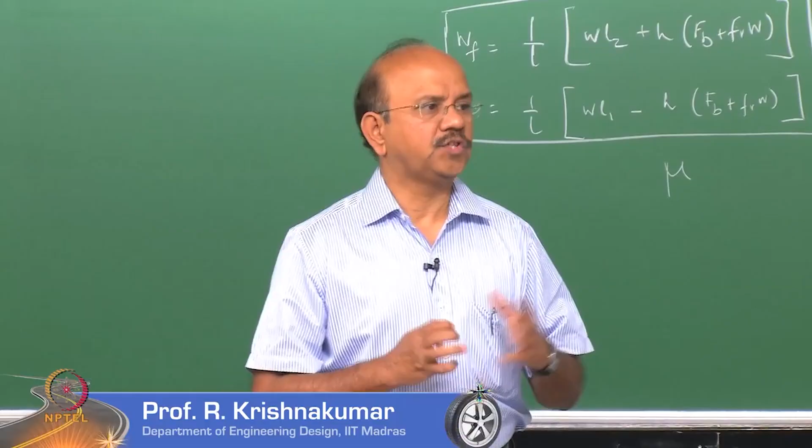We also went to the next step, and we said that we can dump the whole effect of the tire-road interaction into a factor called mu, which is very similar to your well known Coulomb's friction, and said that W multiplied by mu will give me a limiting condition for the wheel to lock. So, in other words, the maximum force that any tire, front or rear, can take would be given by this condition. We can put that the maximum braking force in the front is given by mu WF, and at the rear is given by mu WR. This is where approximately we stopped.

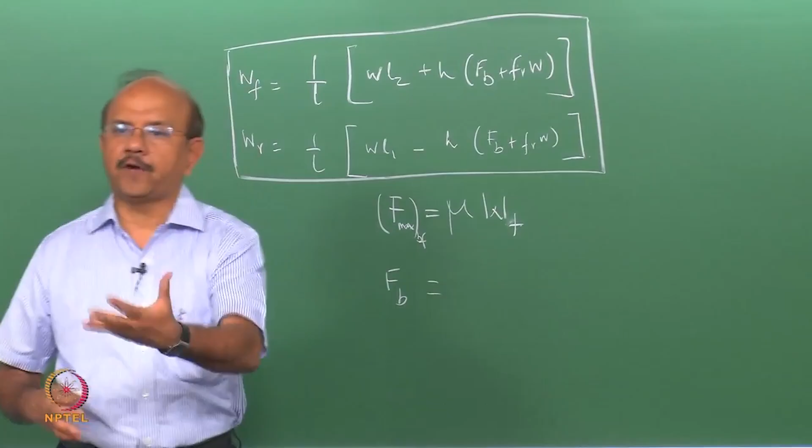We also said that the total braking force is split into the front and the rear. Unlike cars which are front wheel driven, some cars are rear wheel driven, and some vehicles have all four wheels as driving wheels. Braking is distributed in the front and rear. In other words, obviously you know that you have front and rear brakes. Now, the total braking force is distributed between the front and the rear, and let us call the fraction of the braking force which is distributed to the front as KBF, so that the braking force in the front can be written as KBF into FB. In the same fashion you can write for KBR, the braking force at the rear is equal to KBR into FB. Obviously, it is a fraction, so KBF plus KBR is equal to 1.

Fine. Now, let us look at the physics. We have two sets of wheels that are braking, the front and the rear wheels. Now, the front wheel locks when the force generated in the front wheel is equal to mu into WF, and the rear wheel locks in the same fashion. Assume for a moment that KBF and KBR are randomly distributed, we do not know, just one value. What would happen? One of the wheels will lock first, the front or the rear wheel. The front wheel locks, which means it starts skidding, when you give more braking force to the front. Look at it this way: the front wheel is now skidding, the rear wheel has not locked, so it still has some force that is unused for braking. Hence, the optimum condition is one where you use the complete force FB to brake the vehicle.

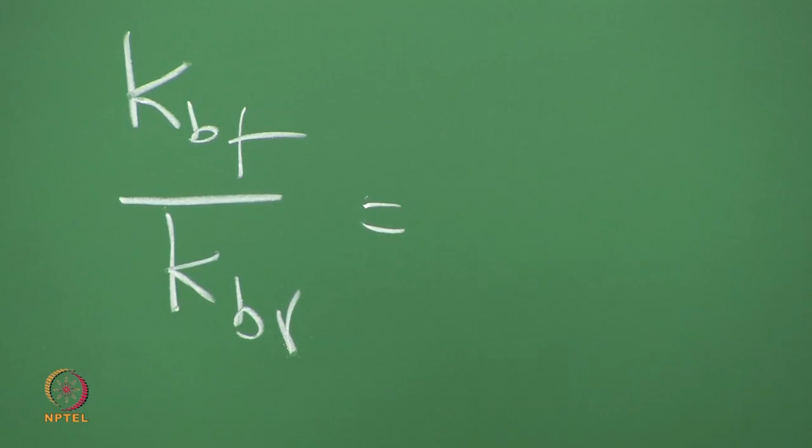So, in other words, if the braking forces are to be distributed such that the maximum braking force develops at the same time, it means they are distributed proportional to the front reaction WF and the rear reaction WR. So, what is that condition? We simply say that KBF by KBR should be proportional to WF and WR. This can be written in a very simple fashion, from this equation, as L2 plus H by L, and I am going to replace FB, the braking force, by means of the deceleration quantities, or you can say mu if you want, in terms of mu into WF. So, we can write this as plus H into mu plus FR, and WR you can write as L1 minus H into mu plus FR.

Okay. So, if the two forces are distributed proportional to WF, which I have just rearranged in this fashion, then that is an ideal braking, where both the front and the rear would brake at the same time. Typical values for this would vary from one vehicle to the other, and even for the same vehicle it would vary.

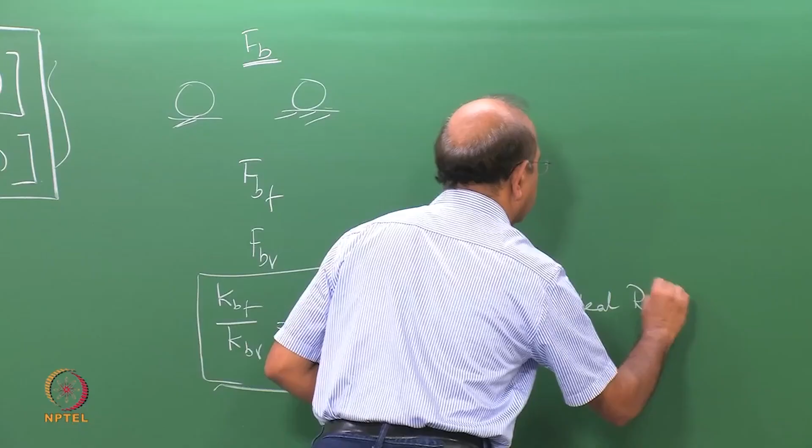Why? Though we say that this is the ideal ratio, it is not a constant, even for a vehicle, and definitely would vary from one vehicle to the other. Why would it vary for the same vehicle, for example? Because when you load the vehicle, it is not necessary that L1 and L2, which are the distances from the CG location, are the same. It may vary. For a truck, it would vary a lot more than a car, obviously. So, when you load, say, a truck, then definitely the CG location can shift to the rear.

Incidentally, L1 in many of the textbooks, and we are following Theory of Ground Vehicles from Wong for this part. One of the books I forgot to mention is by Wong. We will shift from one book to the other, and use our own experiences in this course.

So, one of the things I just want to point out is that instead of L1 and L2, people also use A and B. A and B is very common. In the notation A and B, A is the distance of the CG from the front, and B is the distance of the CG from the rear. I use capital L and small l interchangeably. Both of them mean the distance between the two wheels. So this is the ideal ratio.

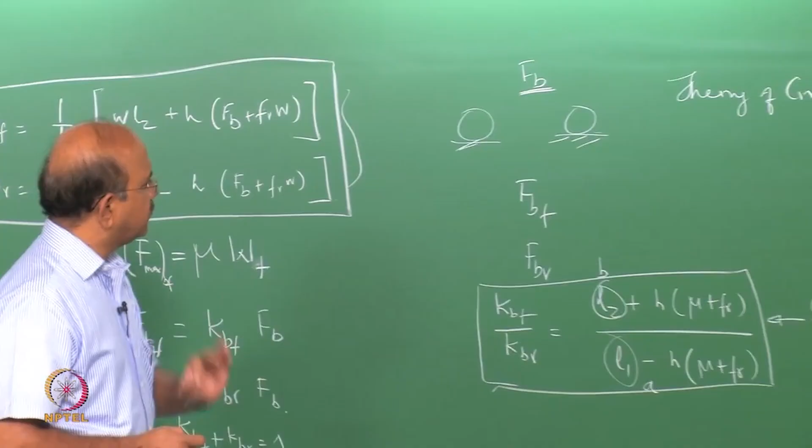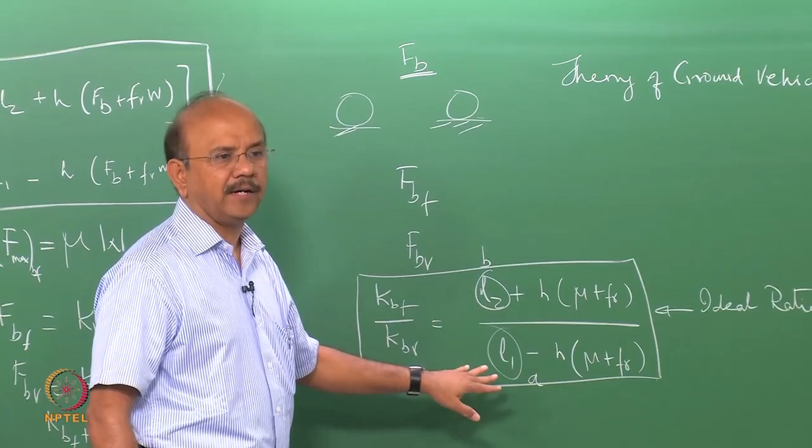So why would it vary within a vehicle? Obviously, when the road conditions are different, mu would be different, mu would not be the same. So mu would change. So for the same vehicle, A and B or L1 and L2 are not a constant. I didn't use A here because you may confuse it with acceleration. That's the reason why I had not used A and B here. I had used L1 and L2 at this place. So this is a problem. You don't have an ideal. That's why you have so many other devices like ABS and other things, in order that we don't get into some conditions which we would discuss probably later in the course.

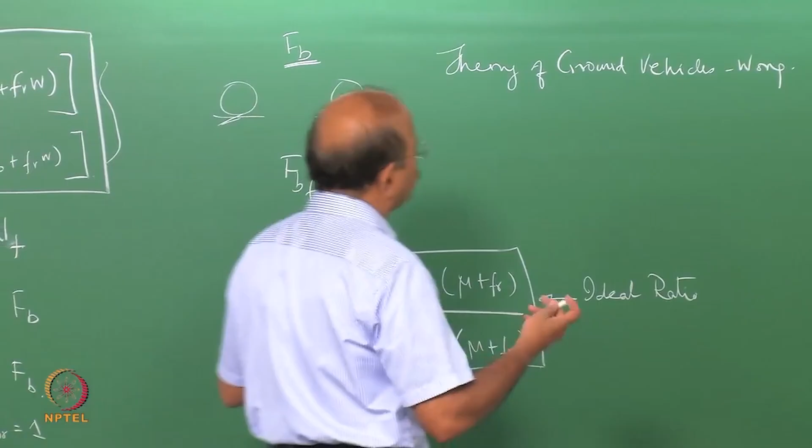Now that's the first thing. Then what is usually used? What is the ratio that you use? It varies. Many of the truck companies today use 50% to 50%. Some of the car companies use 47, 53 and so on. So it's a very difficult ratio to arrive at, because even for the same vehicle there would be a change, and hence we have this problem of fixing a ratio.

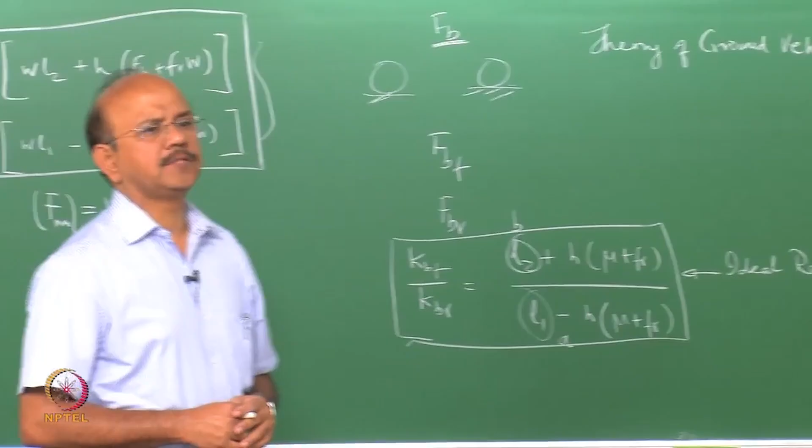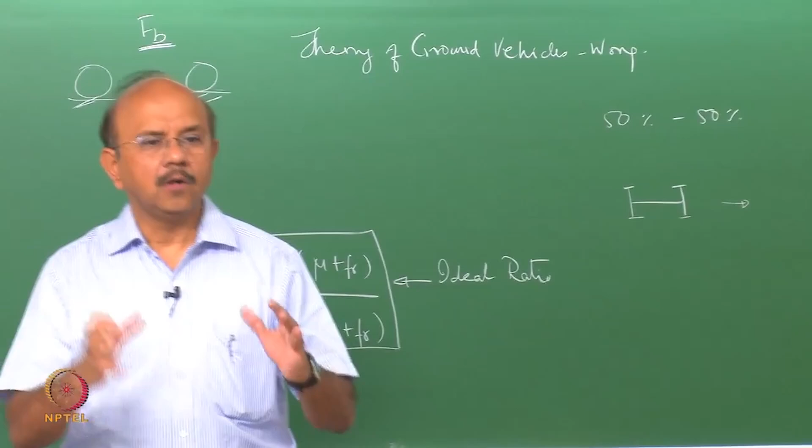Now, why are we worried about locking? What happens during locking? Let's understand that. Let's say that I have a vehicle, just a schematic diagram of a vehicle, which is traveling in this direction, of course. And let us say that one of the wheels locks. Let's say that the rear wheels lock. What is meant by locking physically? Locking simply means that all the mu that's available for that tire has been completely consumed. So no more of that mu, the friction factor, is available for any other force that acts on that wheel. Let's assume that the rear wheels have locked, all mu has been consumed.

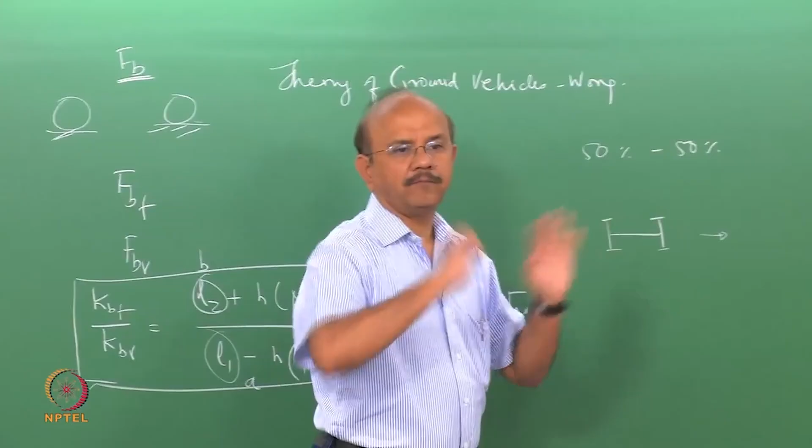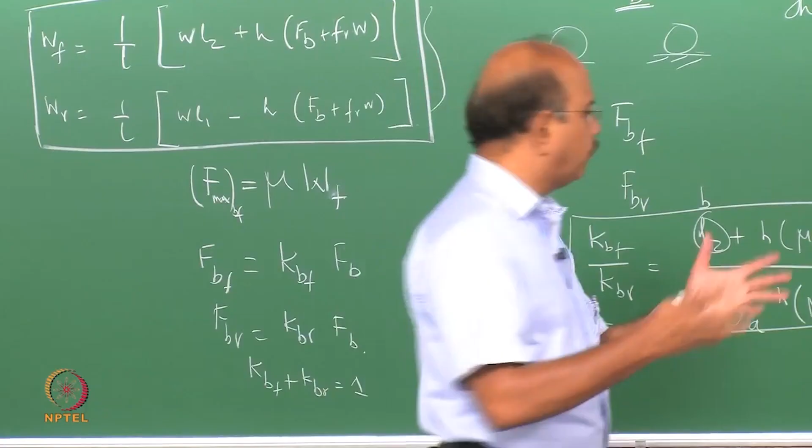Now there is a small perturbation to the vehicle. It is only in theory that the vehicle would run straight. There would be a camber of the road, or there can be a crosswind, or a small undulation, or a small bump, whatever it is. There are perturbations on the roads, and you can't always drive straight, and due to so many reasons your vehicle has to develop a lateral force.

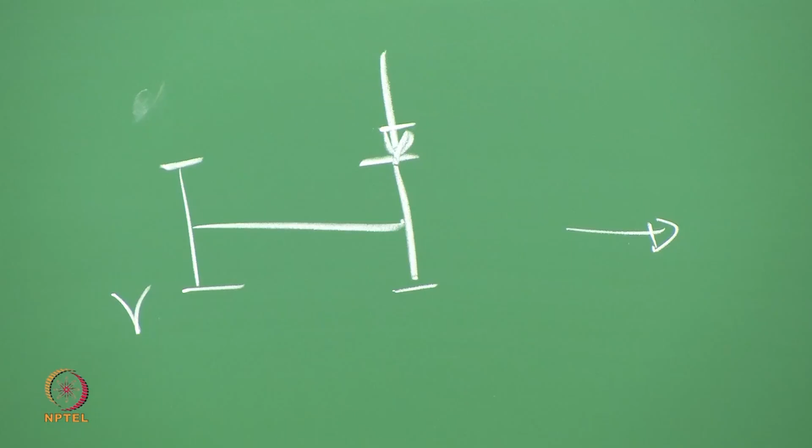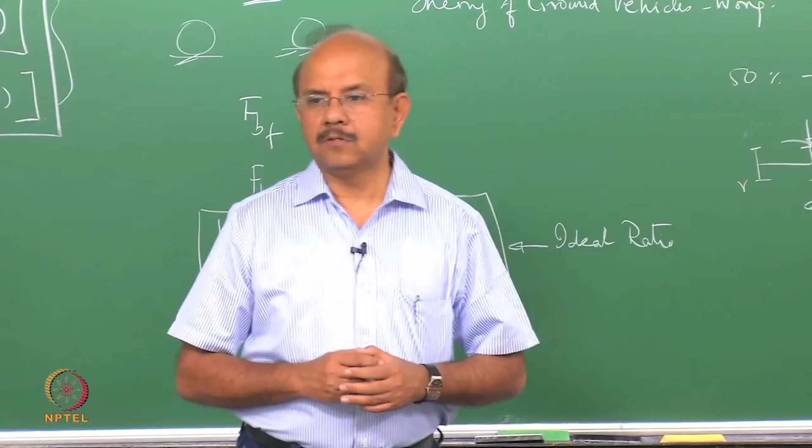This one here, the rear, has lost the ability to support any lateral force, and so only the front wheel would develop the lateral force. So when the front wheel alone is capable of developing a lateral force, that's the situation. All of the lateral force that's required will be developed by the front wheel. So what happens? The vehicle starts spinning, or in other words, the vehicle loses what we would call directional stability.

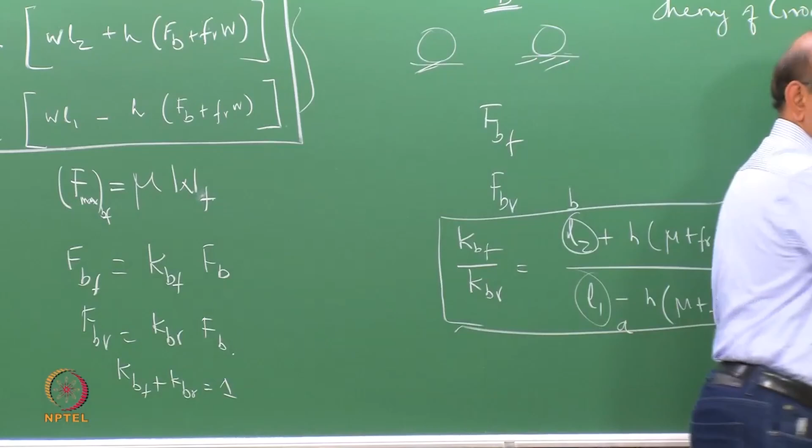So it would spin. In fact, it can spin so much depending upon the perturbations. It can just spin and even go 90 degrees or more. So, when the rear wheel locks, the vehicle loses directional stability and would start rotating or yawing, as it is called. On the other hand, let us consider what happens when the front wheel locks.

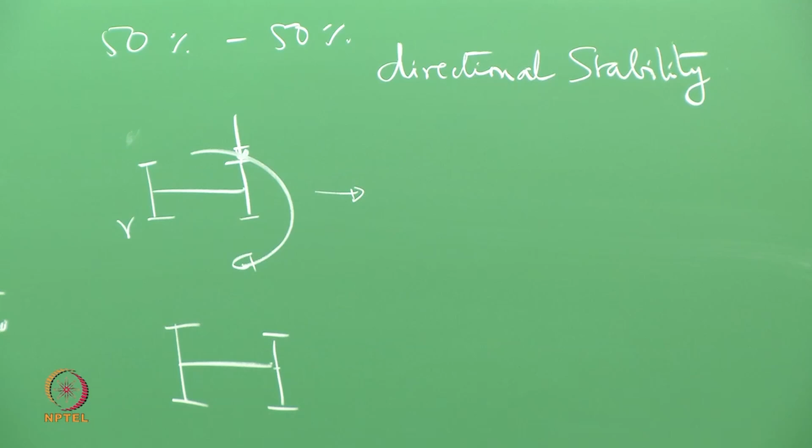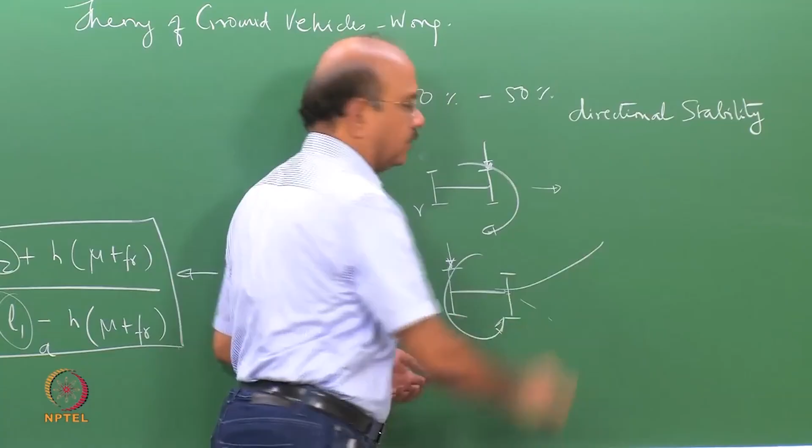When the front wheel locks, obviously it loses the ability to take further forces, and so all the force that is required to cater to the needs of the changing orientation of the vehicle, the lateral force, is at the rear. So, the vehicle would now lose directional control. A small change this side would not happen because the vehicle would now be yawed in the other direction. So, it would now start going like this. Okay. So, we call this loss of directional control.

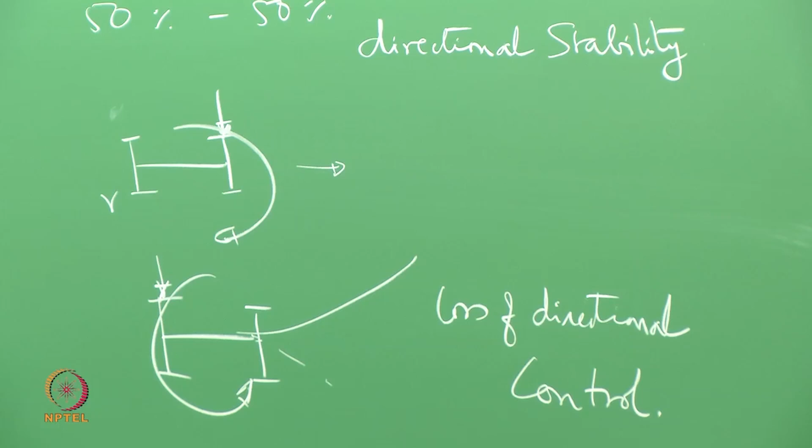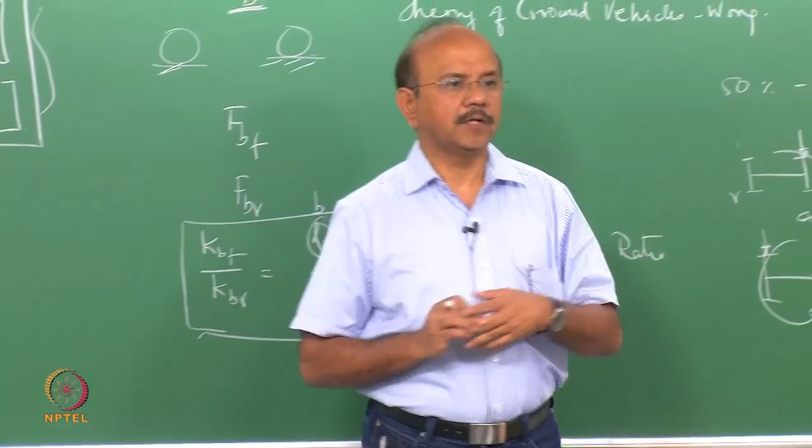Clear? Okay. Now, if you are a driver, you have all the feel for the front wheel, because your steering would give you the feedback. So, when the front wheel locks or is about to lock, you know that something is going wrong. And it is possible for an expert driver to get back from that kind of loss of feel, in other words, to steady the vehicle. On the other hand, if the rear wheel locks, even an expert driver cannot feel it, and by the time he realizes, everything is over. So, we need special devices in order to avoid this kind of locking and loss of directional stability and directional control. Is that clear?

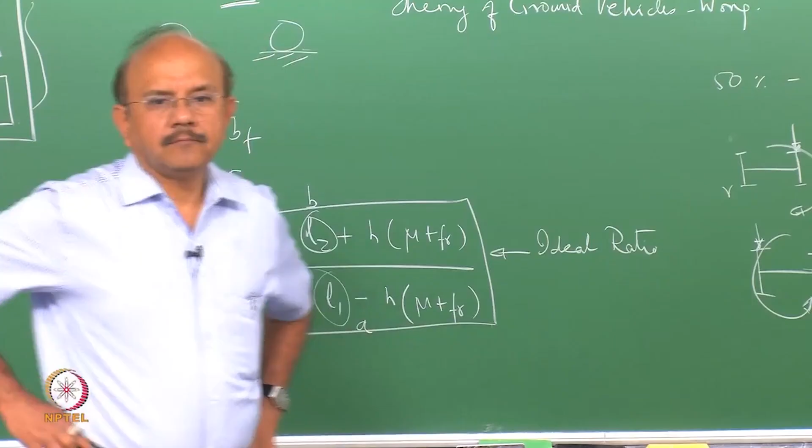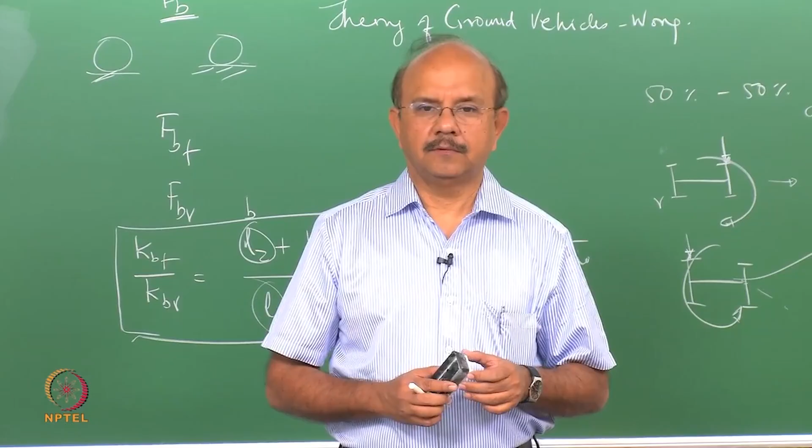Okay. Now, let us go into some details of this braking further. One of the key questions which we are going to ask is, what is the deceleration that can be achieved by given braking conditions? What is the maximum deceleration that I can achieve? Very important question, because ultimately brakes are also judged by deceleration and, more importantly, the braking distance. In order to understand this, we need to understand what would be the deceleration level before the brakes start locking. Right. This is what we are going to do now.

I am going to take two equations, equate them, and then get what is called the maximum deceleration when the vehicle locks. Remember that our good old friend rolling resistance is going to help braking. One of the conditions that we already wrote, neglecting all other forces, of course, let us say we neglect all other forces like aerodynamic force, you can add them, that can be an exercise for you just to bring out the physics. Let us look at only these two forces. So, this will be equal to, denote that we had replaced minus a by d, and hence all the directions are now. So, d is actually the deceleration.

We also have, this is one equation, we also have an equation for WF and WR, and that can be written as, how did we write it? We took W out. What's the first term for WF? L2 plus, what was the term which is inside? FB plus FRW. So what can you do from this equation? You can replace what was in the bracket in the previous case by this, and can I not write this as the deceleration divided by g? Okay. In the same fashion I can write down WR as WL minus d by g. Okay, what was in the bracket? I just replaced it by the first equation. Right.

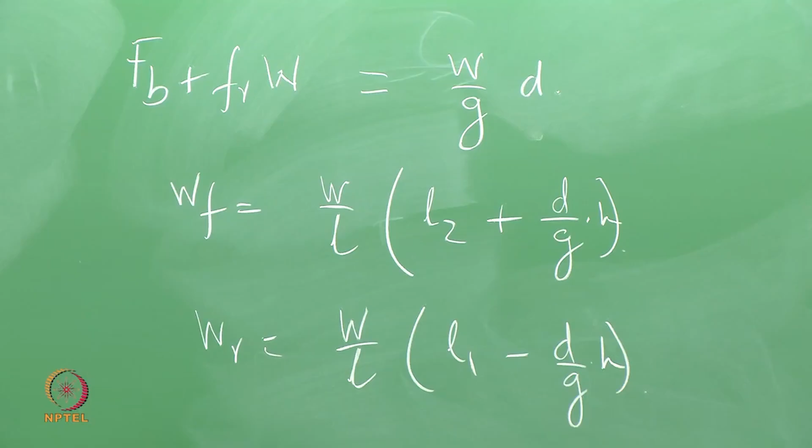Now, let me write down FB from the first equation, call that the first equation, this the second equation, the third equation is FB equal to W by g d minus FR into W. And I also know that the front braking force is equal to KBF into FB, and the rear braking force to be KBR into FB, right? Which is 1 minus KBF into FB, and so on. I also know that FBF will lock, that is the front force of maximum, is equal to mu into WF. Okay, the maximum before it locks is that, and FBR is mu into WR.

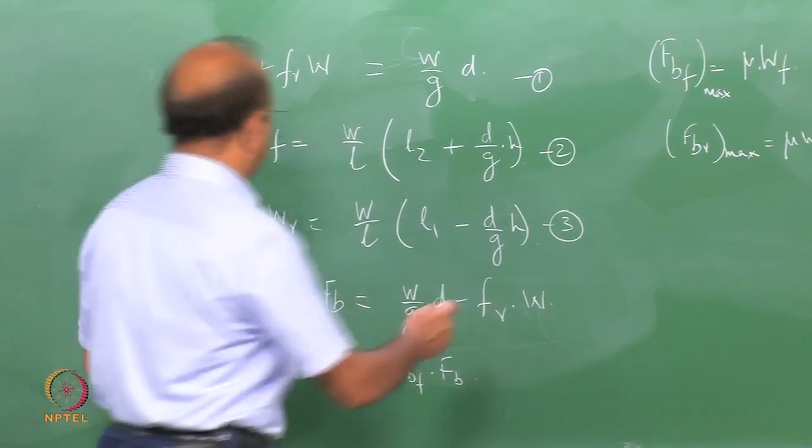So now what I am going to do is, let me call this 4, let me just rewrite it a bit: W into D by G minus FR, okay. And so this would become KBF W D by G minus FR, right? Okay.

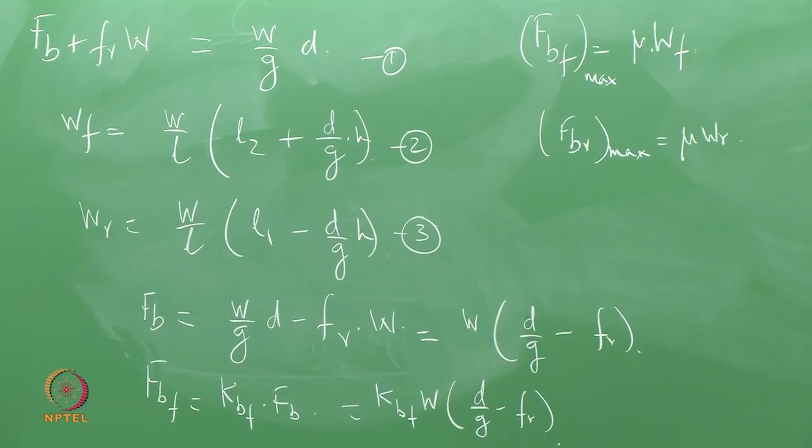Now what I am going to do is, under the maximum condition, note that this is valid only for the maximum condition, I can equate this with this, and rearrange the terms. So substituting from equation 2, I can write this as mu W by L, L2 plus D by G into H, that's equal to KBF W D by G minus FR. Okay, let's for a moment remove that. Let's only look at this first.

Okay. What is this condition? When we reach the maximum allowable before it starts locking. Rearrange the terms, and then I get this D by G, or in other words, the deceleration normalized by G. We will talk about it in a minute. Just rearrange it and tell me what this can be. Okay, take it to the other side and let me know what it should be. So bring it to this side, not very difficult.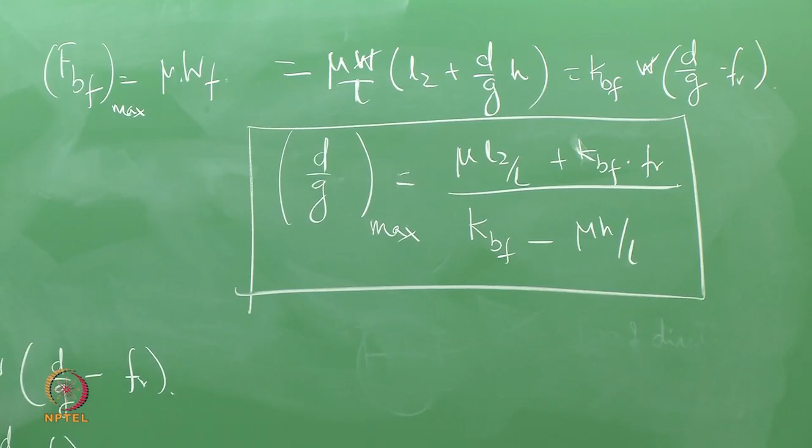Please note that we have normalized with G, and this is the language vehicle dynamicists use. Whenever they talk about acceleration, they won't talk about meters per second squared and so on. They would usually normalize it with G and talk in terms of these normalized quantities. They would say that it is 0.3 G, 0.2 G, 1 G and so on. Hence this expression is normalized with G. This is the condition when the front wheel locks, the maximum deceleration that is possible when the front wheel locks.

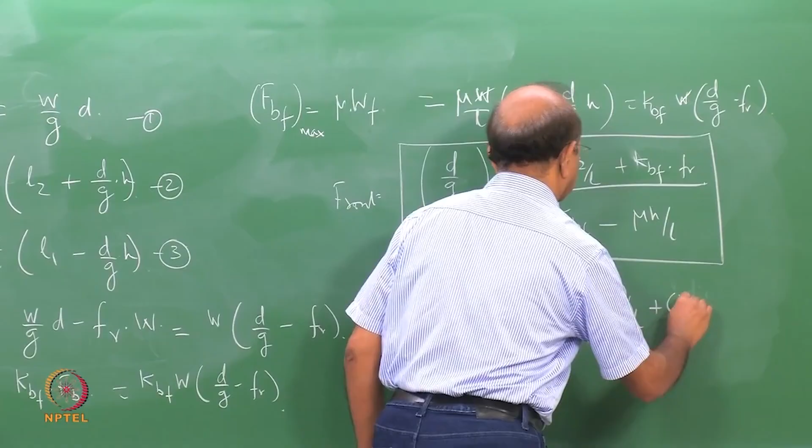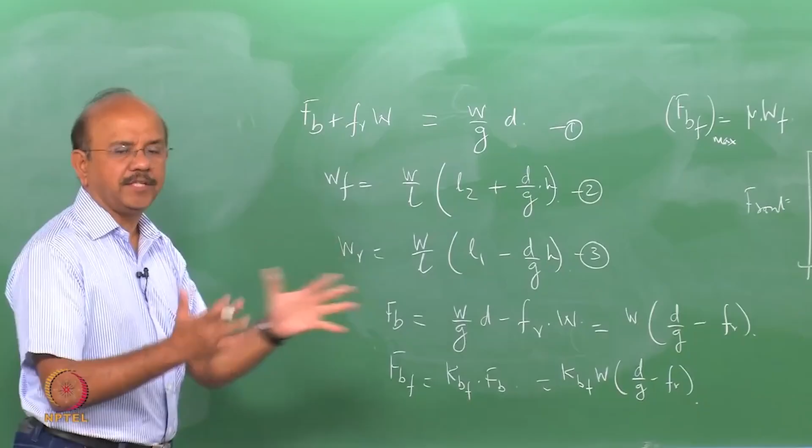Okay. Now derive what this should be when the rear wheel locks. What is the condition? Just substitute it and rearrange it. Okay, see that you get this, this would be the condition. The same thing, I have two versions of the same equation. I am equating them, rearranging the terms, and I am getting this. So front lock, let me call that that, and that is the rear lock.

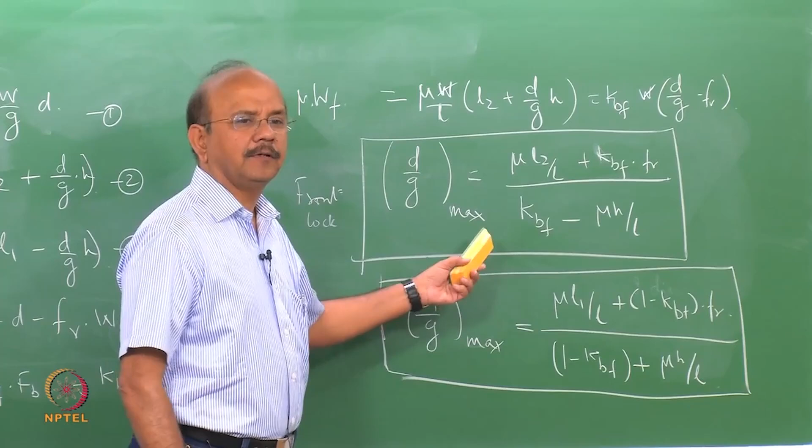Right. You have to be very careful in interpreting this equation. For example, KBF is equal to 0. Let us say it is possible that I have all the braking on the rear wheel. KBF is equal to 0. What happens to this equation? It becomes minus. Is that correct? KBF is equal to 0, it becomes minus. Why should it become minus?

The whole crux of this thing lies in this equation. Very simple, all of you know it. Sir, it's actually an inequality. Exactly. So it is very important that it is an inequality. It is very dangerous to draw, for example, for friction, to put this as W, many books do that, and then say that F is mu into W. Now let us say that this is 100, and mu is equal to 0.3.

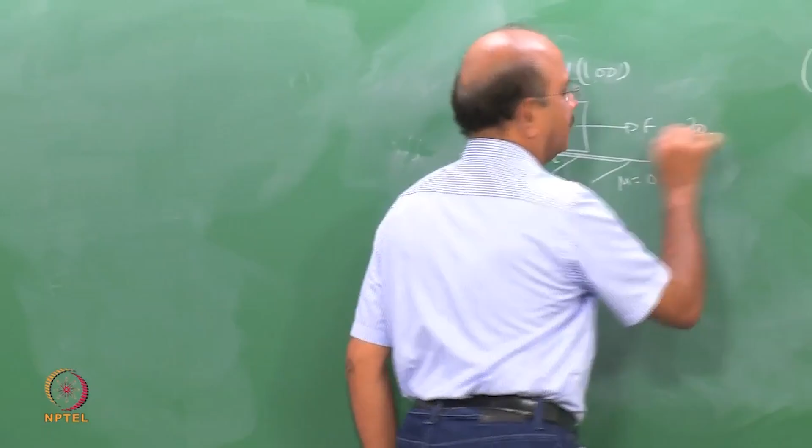So if you put a diagram like this, what would happen? This would become say 30. So I apply a force of 20. The equilibrium dictates that actually the block moves in the opposite direction. So you have to be careful in interpreting it, because very correctly, as you said, it's an inequality. Whenever I use equality, that's the condition under which we overcome the friction. Or else if you substitute it as you like, you would get into trouble, and that block would start moving in the opposite direction, which is physically not correct. So this is one word of caution. Sometimes you get stuck when you derive it, and it's very important that you understand this. Right. Okay.

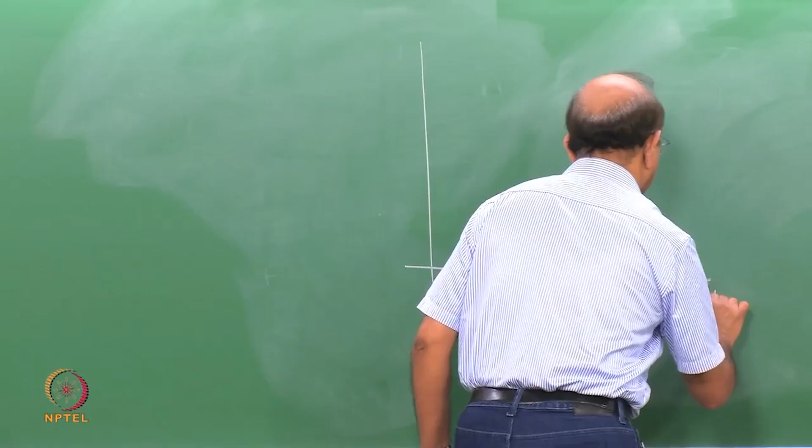With that in mind, it's a very important rider, let's now interpret what happens when I change KBF. Let us say that I plot KBF on this axis, and I plot my deceleration, let's say D by G, on this axis. As I keep increasing KBF, if there is no force in the front, which will lock? The rear only will lock. So when I keep increasing KBF, more and more force would go to the front. If I now draw, say, about 0.5, a limiting case for the rear wheel to lock, this would be the case. Or in other words, the deceleration at which the rear wheel would lock is this. So that is the limiting value for the rear wheel to lock.

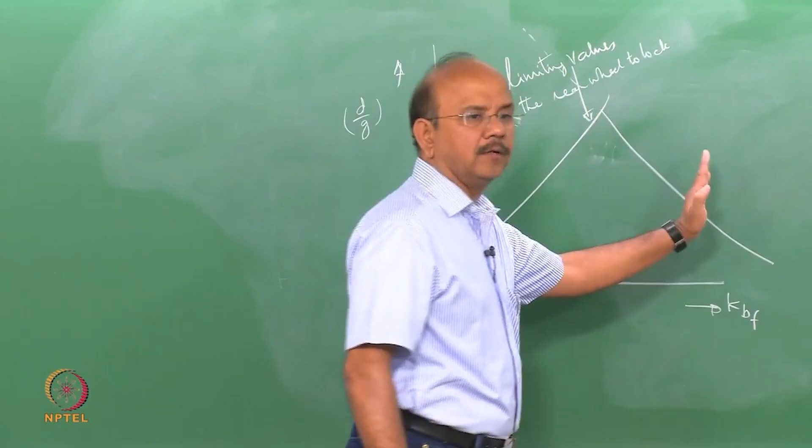Why is it increasing? Because the force on the rear wheel is now increasing. Right. In that small block which we drew, the force is small. When I increase KBF, that means I am giving force to the front. So actually at some point, that would start decreasing. So that would be the curve. Okay. That would be the curve which gives the limiting value for the front wheel to lock.

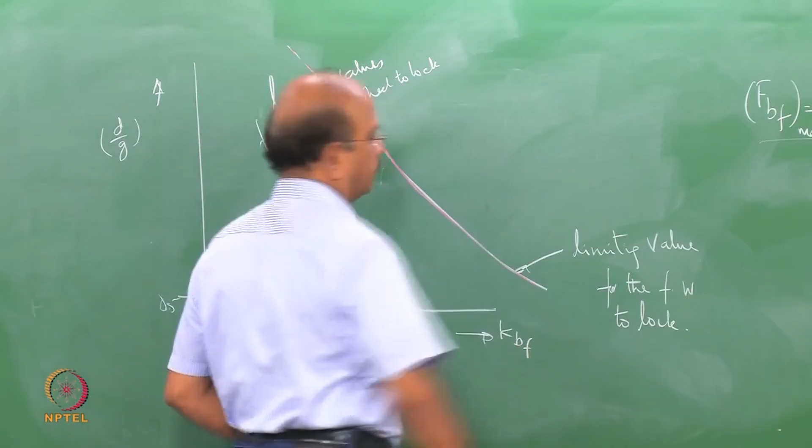For the front wheel to lock. Look at that carefully. I have actually two curves. If you look at, let's call this point A. If you look at a point which is to the left of A, who will lock first? The rear wheels. To the right of A, it is the front wheel that will lock.

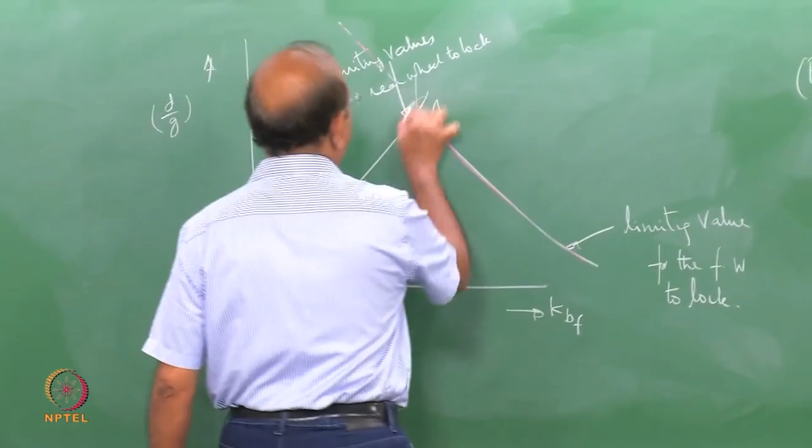So at point A, what would happen? Both wheels will lock. That's the ideal condition. I have used all my braking force optimally when both wheels lock. So that would be the ratio at which both wheels will lock.

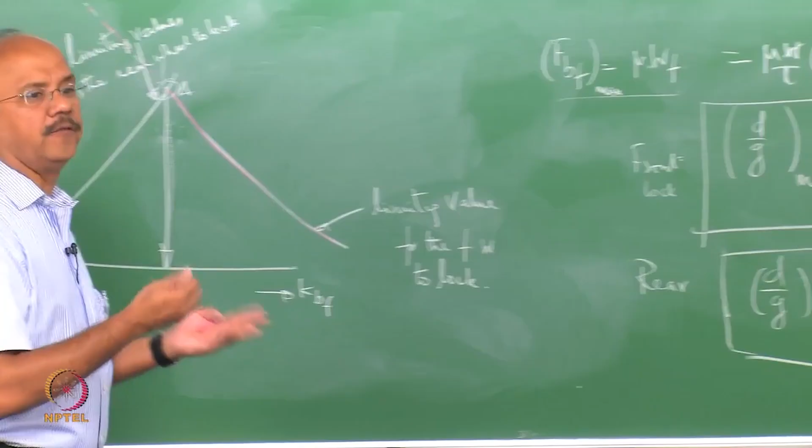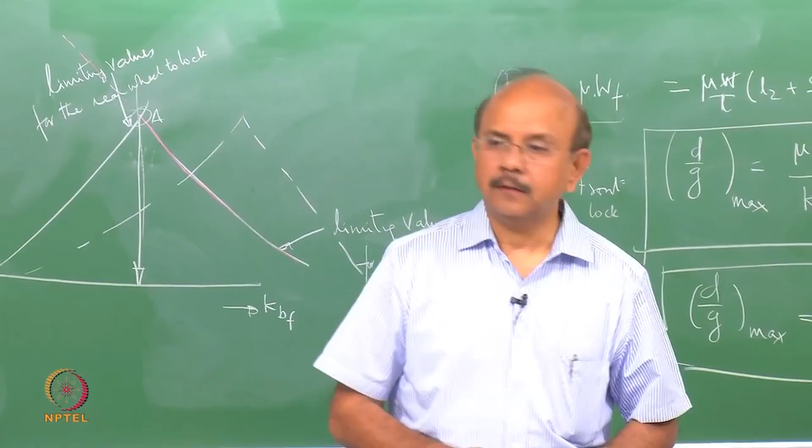Unfortunately, as I told you some time ago, this graph is not a constant. If the weights are higher or something like that, then it would take maybe something like this. So this would vary depending upon the weight as well as depending upon the mu values. Clear? So, that is as far as deceleration is concerned.

What is as important as this for us is the braking distance. Many companies put a lot of importance on braking distance. If you are a tire manufacturer, one of the things required of you is to meet the braking distance. We spent a few minutes on braking distances. Though I said braking distance is important, of course braking distance depends upon deceleration. So there is no question of removing this and talking only about the braking distance.

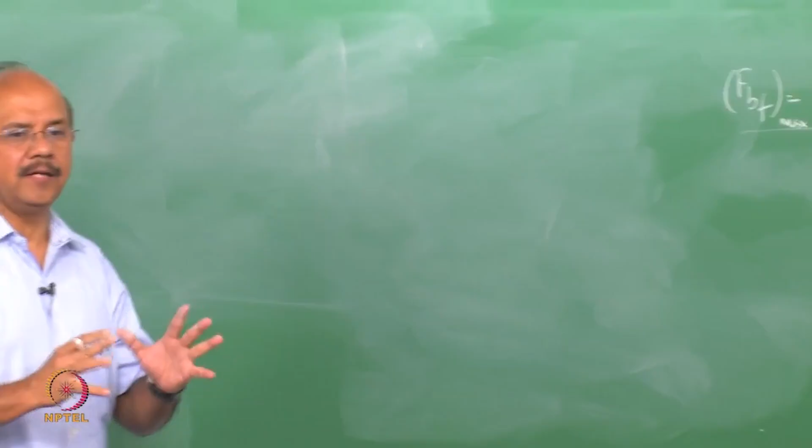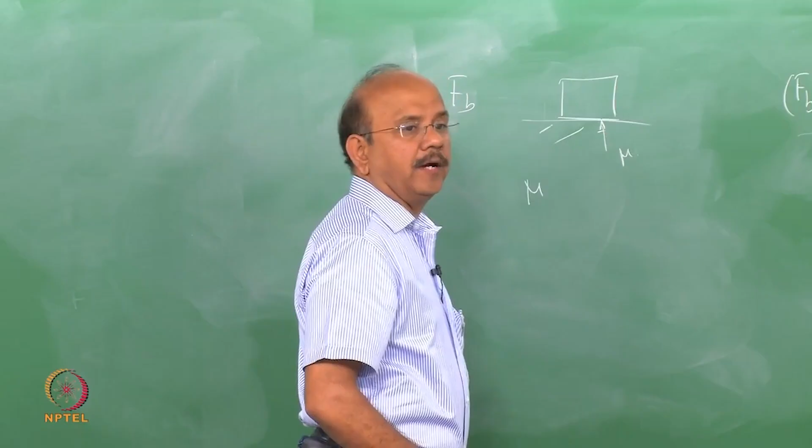Let us look at an ideal condition. What is an ideal braking? When I apply a force Fb, I look at a car as one unit, just now what we drew. Let us say that it has wheels and so on, so there is no issue about it. Let us say that mu is the factor. So, what would be the ideal condition? Ideal deceleration is mu into W, which is the braking force.

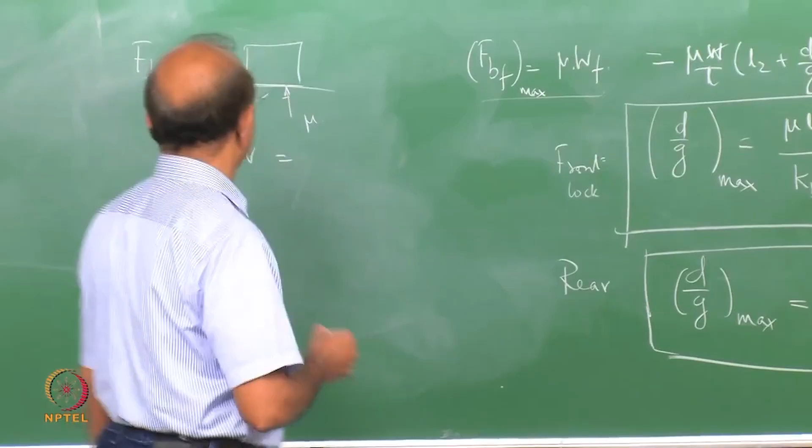Note that I am not going to use inequality, I am just going to use equality, so you will know what is the condition at which I am writing. So, this should be equal. This is the force that can be withstood by the tires in total. Ideal condition, this should be equal to W by G into D. In other words, mu is equal to D by G. We always normalize it with G. So, when D by G is equal to mu, that is the ideal condition which we can achieve. Any other condition you can't achieve, or you can't overtake this condition. You can achieve only this.

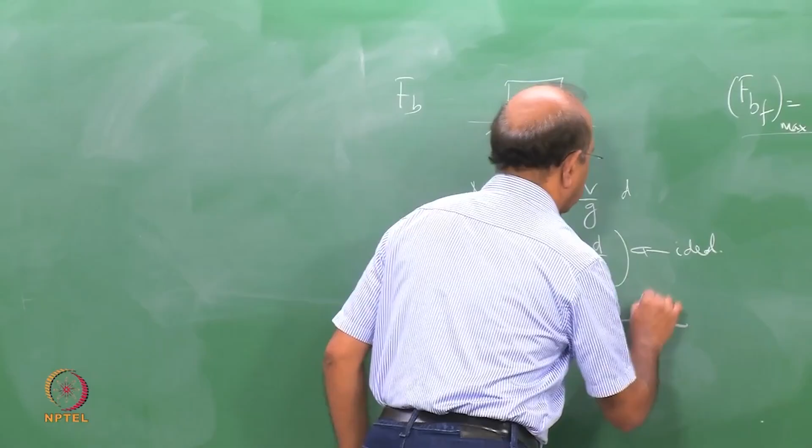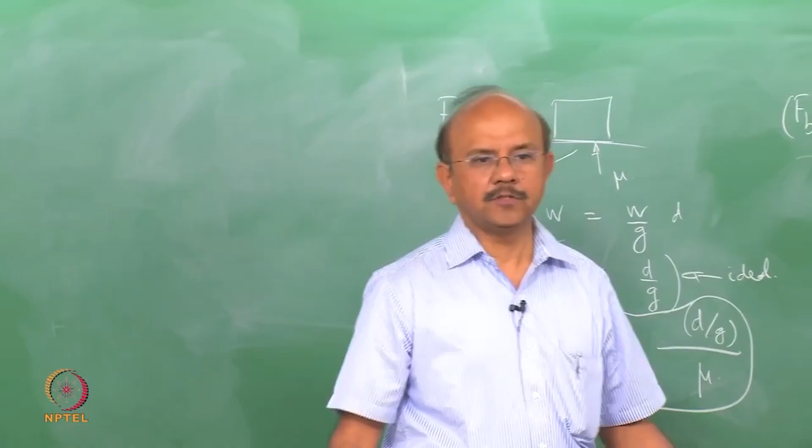Hence, we define an efficiency of braking. This is an ideal, the best condition possible. So, obviously, efficiency depends upon the best condition that you can achieve. The efficiency of braking is given by what you have achieved with a particular brake and vehicle, which is D by G, normalized with G. Note that D is deceleration, I keep repeating so that you do not get confused, divided by mu. That brings out the simple fact that when mu is less, for example, when you are driving in water or ice, the mu dictates the braking force, decelerations and so on.

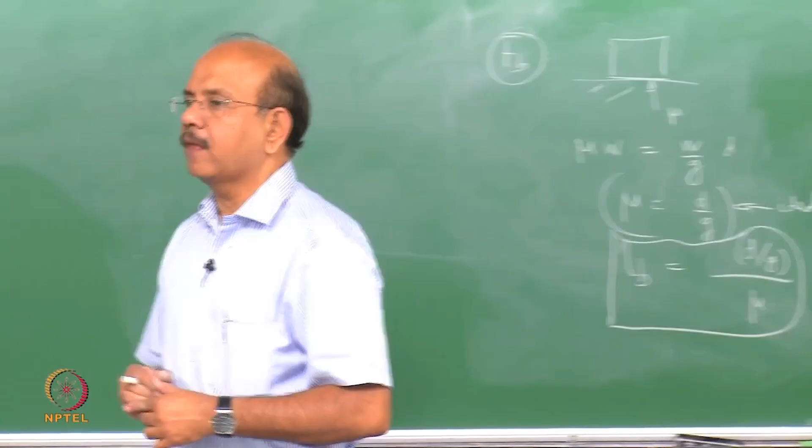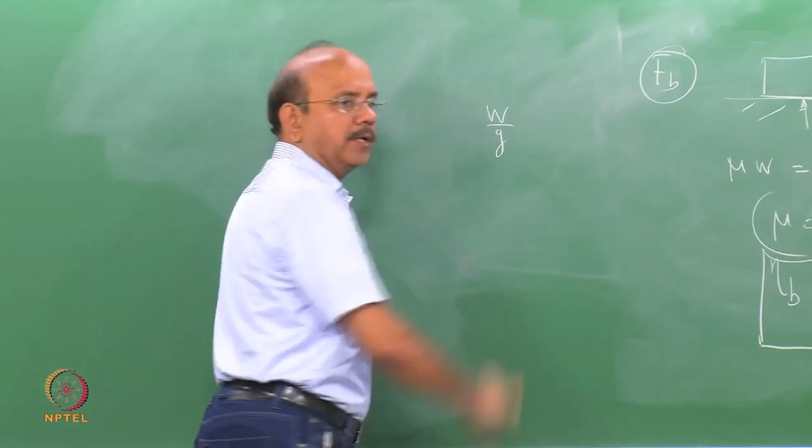Now, we are looking at FB. FB, the total force, also goes to decelerate the revolving components. In other words, when there is a deceleration, the deceleration also applies to all the revolving components. This becomes very important in a motorcycle, and not to that extent in a car. Since there are rotating components which also have to be brought down, we need rotational inertias to be taken into account. So the whole braking becomes quite complex if I have to write it out. In order to avoid that complexity, what you usually do is put a factor to the mass. If W by G is the mass of the vehicle, then I would multiply it by a factor which I would call gamma B.

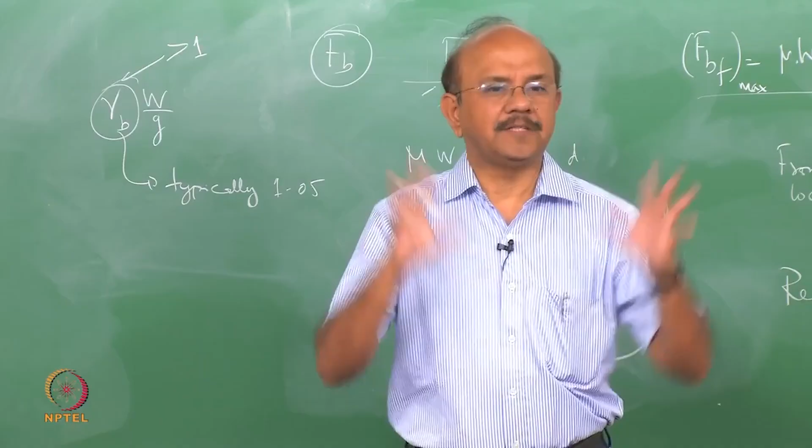So, in other words, since I need to accommodate all those guys who are rotating, I would say that this is as if I am braking a vehicle with a higher mass. So, gamma B is greater than 1, of course, and it is typically about 1.05. No set rules, okay, for some of the vehicles and for motorcycles and other things where you can apply similar things, it can go very high, it can be 18, 20 percent and so on, 1.2, 1.15, 1.2 and so on. So, no set rules, I am just giving you a figure, normally it is about 1.05.

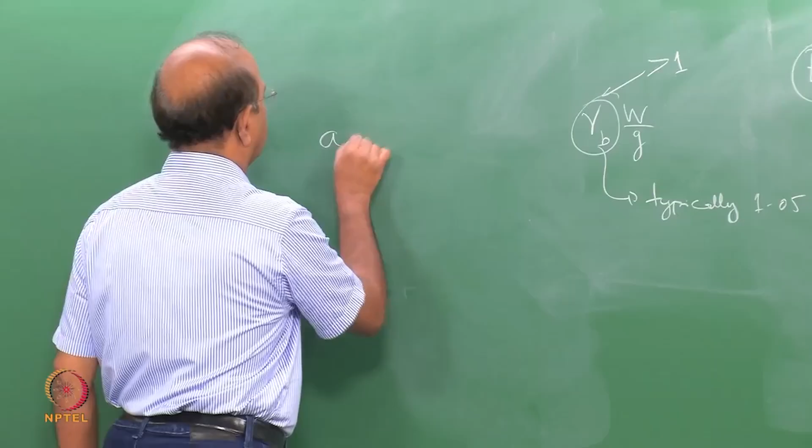There is a way to calculate this. I do not want to digress right now as to how this is done, but let us assume that I know it and I give you a figure and it is 1.05. So, my main idea is to calculate deceleration, and I am going to use a very simple formula which all of you know, a ds is equal to V dV. This is high school physics. Okay. Now, I am going to write down this for a, F by M, which I would call as FB plus sigma of all the resistances.

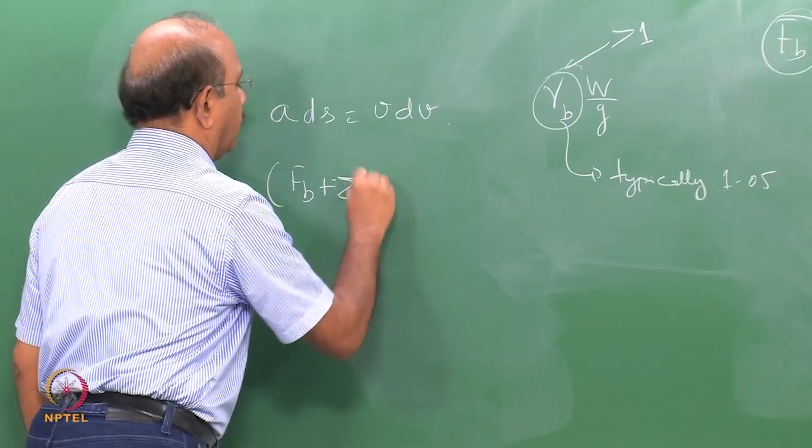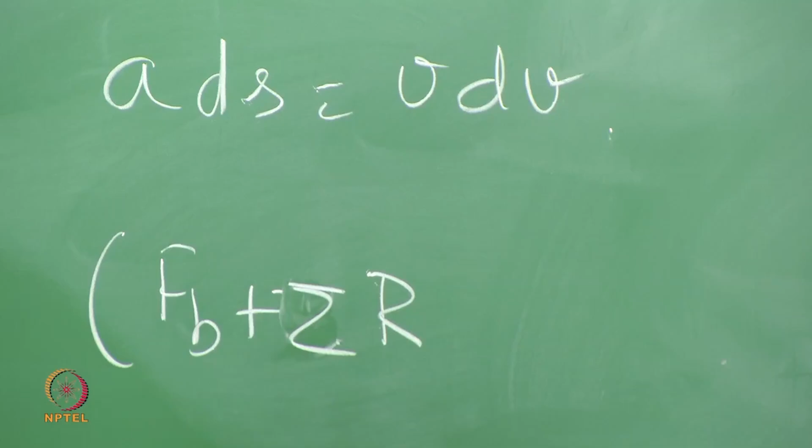Please remember that in the previous expressions I had left out certain resistances just to make it easier for you to understand, but in actuality I have to introduce all the other resistances as well, which includes the gradient and the aerodynamic forces. Okay? So, we need to include not only rolling resistance, we have to include aerodynamic forces, we need to include the gradient and so on, right. So, I am going to put all that as sigma R, we will expand that in a minute because we are going to get an interesting twist to this, and that is a divided by M. M I already said it is equal to W by g, okay, gamma B into W by g, and that multiplied by ds is equal to V dV.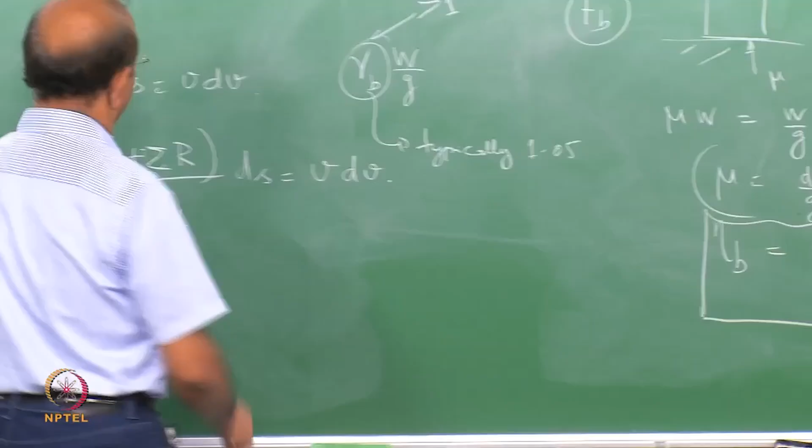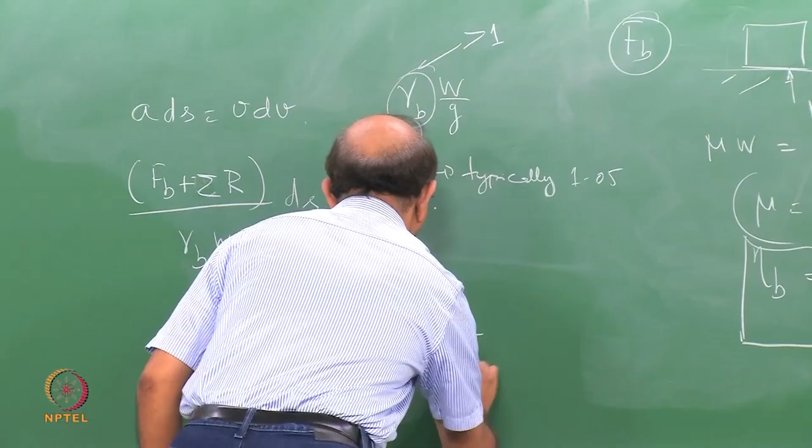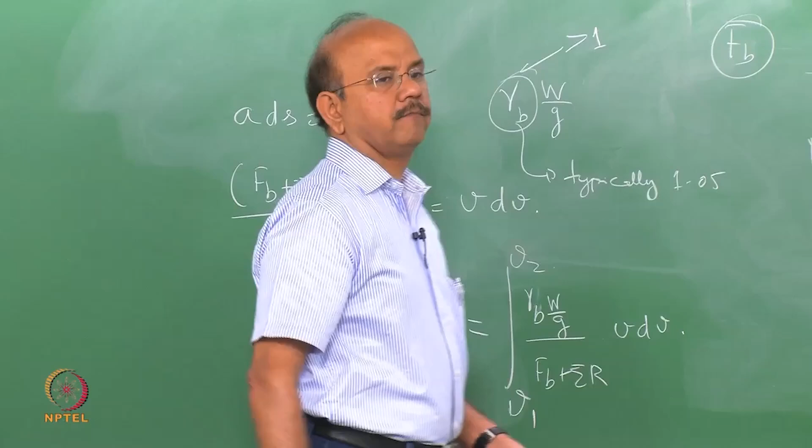Clear? Now, this would have been very simple, but for the fact that there is a term in R which depends upon V. So, in other words, what I am going to simply do is to take this to the right hand side, rearrange it and write it as gamma B W by g, okay, divided by FB plus sigma R into V dV, and then integrate the left hand side and the right hand side, okay. It can be from say V1 to V2, and the corresponding distance when it comes from velocity V1 to V2 we will call it as s, so that this would become s.

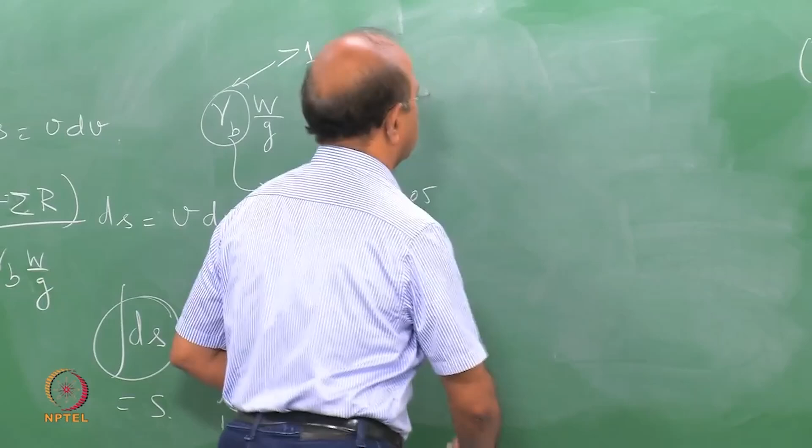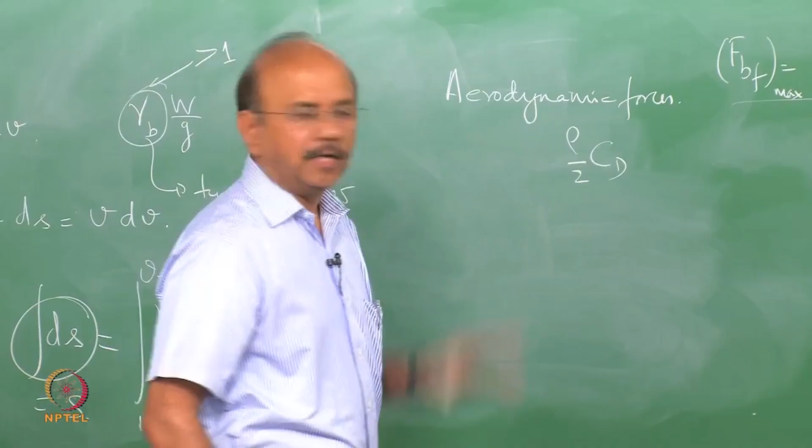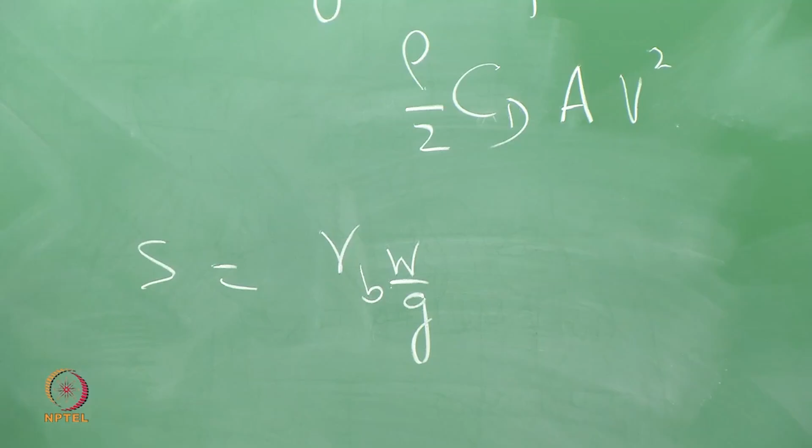As I told you, there is a small twist. What is the twist? The twist is because the resistance here involves aerodynamic forces. And aerodynamic forces can be written by rho by 2, density of the air, very important coefficient, drag coefficient CD, multiplied by the projected area A into V squared. Right. So, since V squared is there, I can't take that out of the integral. So, I have to rewrite that integral to be s equal to, I can take out the first term, and then write this as integral V dV divided by FB plus, write down all that you have for R.

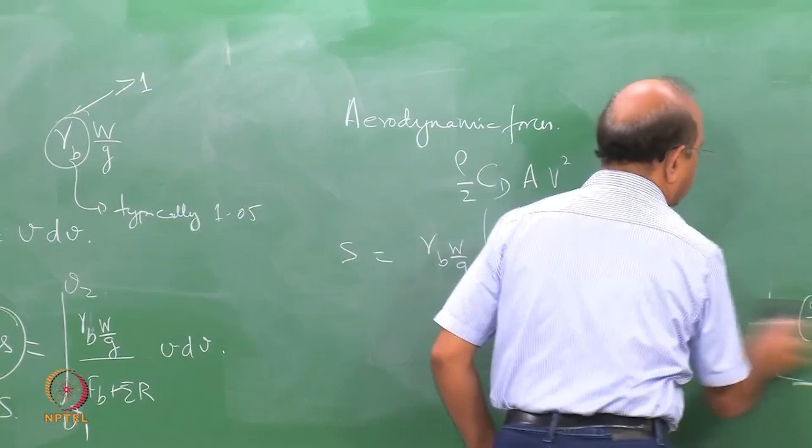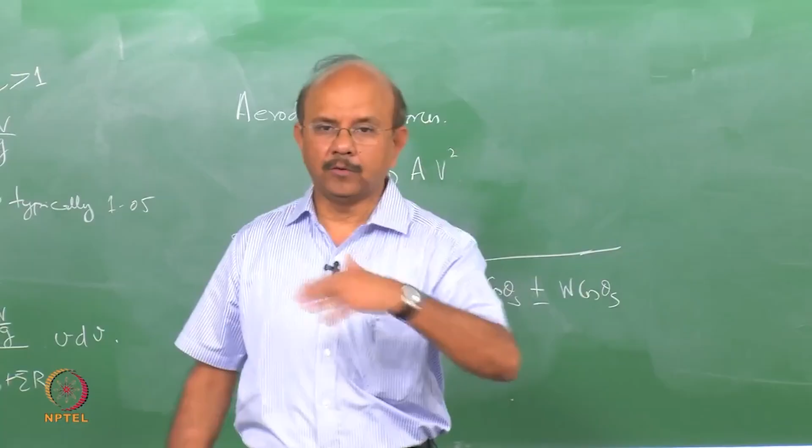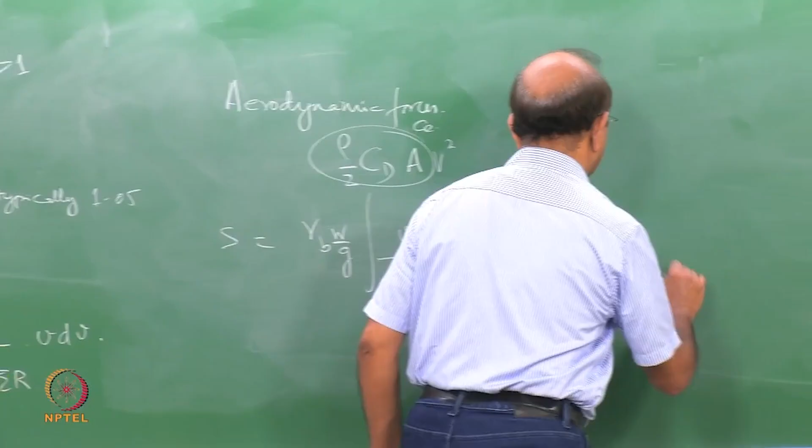If you want to be very correct, then you will write that down into cos theta. Remember that this is what we talked about. We said we will make an assumption, remove that cos theta, but if you want to be correct, you can include that as well as Fr, W into cos theta, plus or minus. Why plus or minus? We left it to you how we are going to write, plus or minus W sin theta S, whether uphill, downhill and so on, plus Ra, we will call this to be a factor called C. Let us say that I am dumping everything. This is because this is a constant, we can assume that this is a constant and write this as plus C into V squared. Whether it is plus or minus is high school physics, I am not going to go deeper into that.

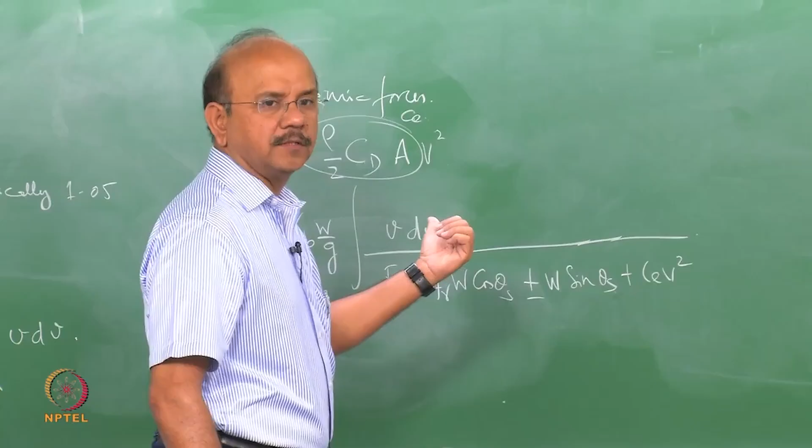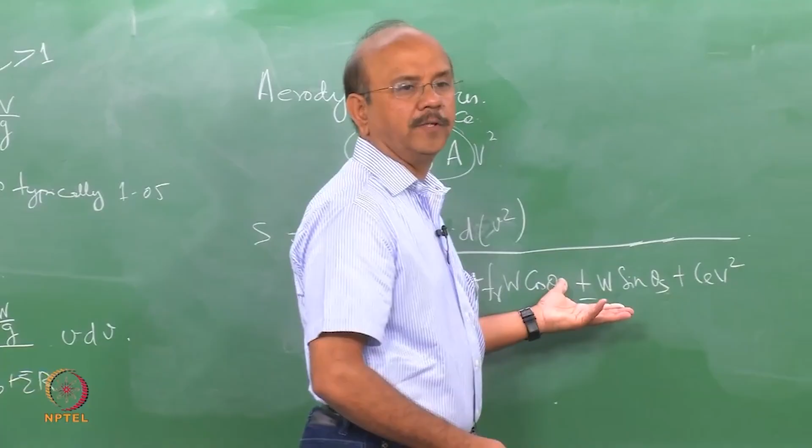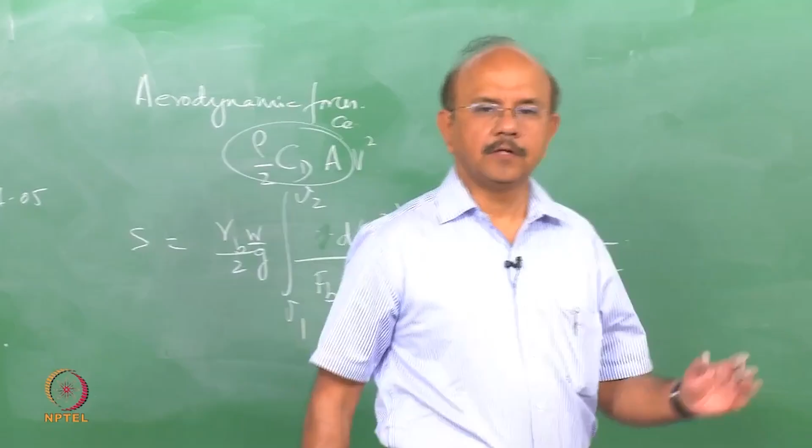So, you have this V squared term, I have to now integrate this. So, regular integration d of V squared, okay, then 2 will be there. So, I will bring that 2 outside, okay. So, d of V squared, or you can say that d of all this plus V squared also, okay, and then what would be the formula? What would happen? It is in terms of log to the base e, okay, right. Integrate this from V1 to V2. We will continue this integration and further interpretation of this in the next class.